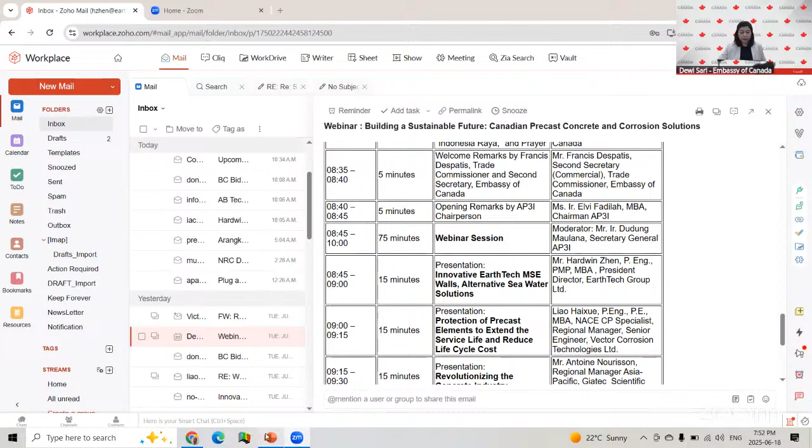So good morning, everyone. I'm happy to be here to introduce EarthTech Solutions and its e-panel and e-wire systems, which could be used for projects in front of water, especially for the seawall, the giant seawall in Jakarta. So today, mainly we introduce the two systems under the company, and also some outstanding applications compared to the other systems available in the market.

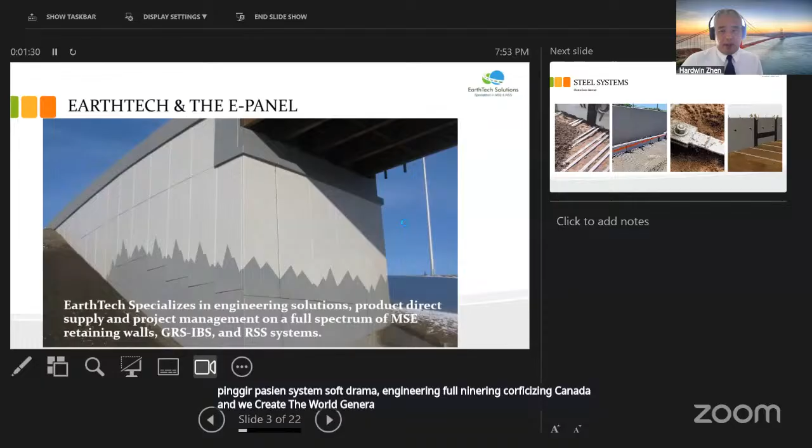EarthTech is an engineering company focused on all different kinds of MSE retaining walls, GRS-IBS systems, and RSS systems. With full engineering qualification in Canada, we could work closely together with local companies to deliver the project, even though the partner internally has no experience in retaining walls. So we can do the product supply and the project management also.

Retaining wall systems all over the world right now could be classified into two categories. The first one is steel, which means using steel as a soil reinforcement behind the panel. When we talk about a panel wall, actually all the panels are required by project spec, so they are all the same. But the suppliers just work differently at the back of the panel.

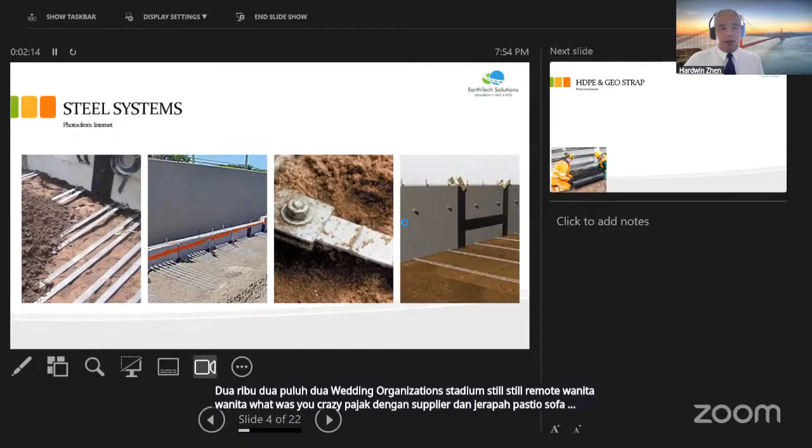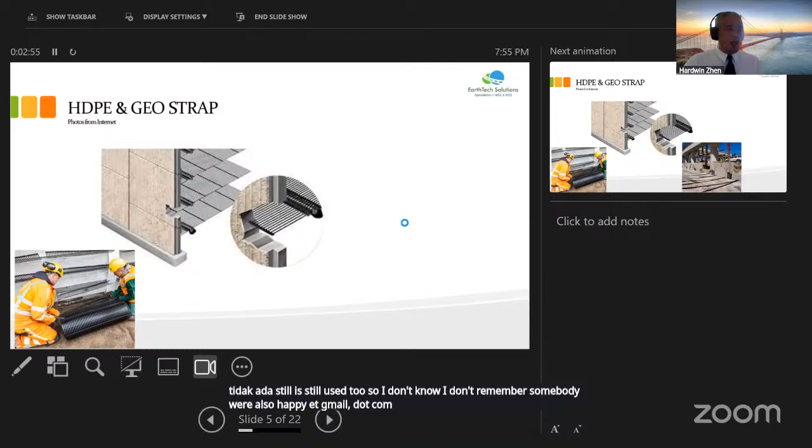Steel so far has the advantage of being a rigid system, but the disadvantage is especially in front of de-iced water, so corrosion is a big concern. Inside of the panel, currently we upgraded it into stainless steel, but behind it, it's too expensive to upgrade from coated to galvanized, then low carbon, and then stainless steel. So other than the steel soil reinforcement, we also have HDPE geogrid, using the geogrid to connect behind.

But this system has a disadvantage: the creep factor, and the connection between the two pieces has a gap, which may allow the panel to rotate a little bit during the installation or after.

So that's the two major systems. Meanwhile, usually you see this geogrid called the polyester geogrid, which was widely used in foundation reinforcement and for retaining walls without mechanical connection requirements. So it's very popular, but due to no mechanical connection, it was used only for a certain area.

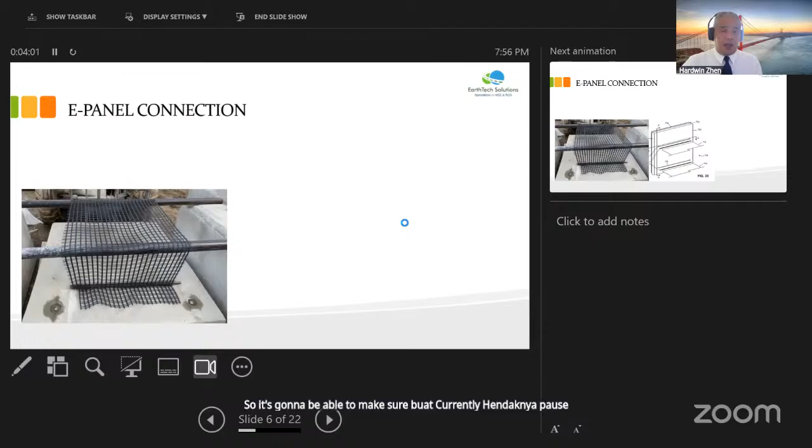But currently, we find the way to connect it to both the concrete panel and the e-wire basket. So we call it e-panel and e-wire system simply. While you use this material, in the market it's 40% cheaper than the same strength of steel and HDPE. So the overall system saving will be over 20%.

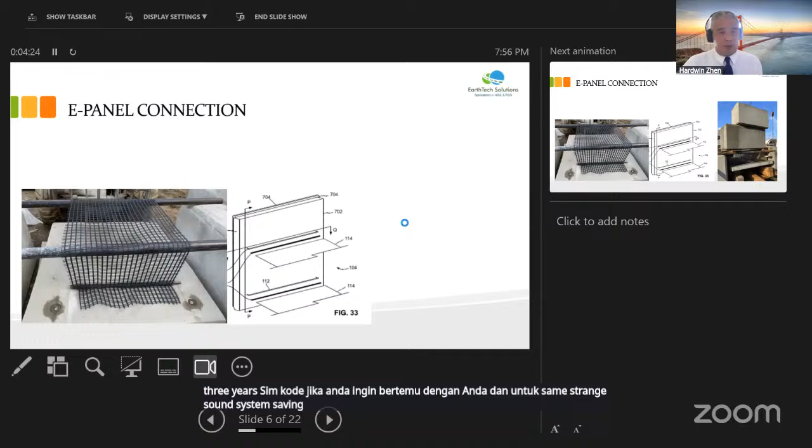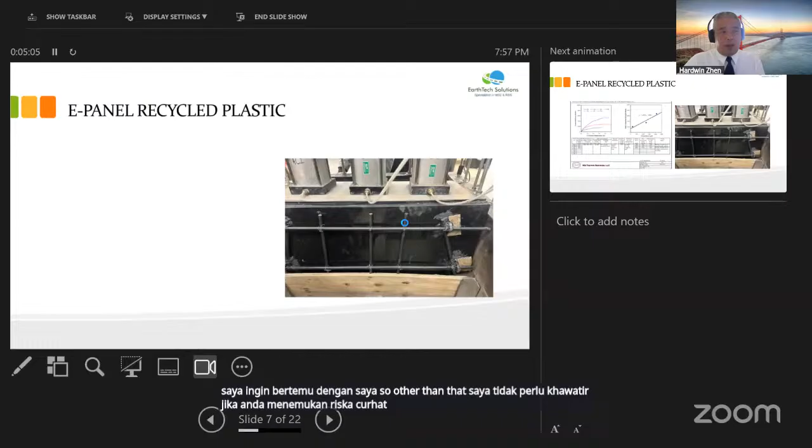So other than that panel system, we also could just cast the panel using recycled plastic. That's the test in the lab, and we got a successful result after. With the system, we can use it for different kinds of finish from the front - they are all the same comparing to any system if you need.

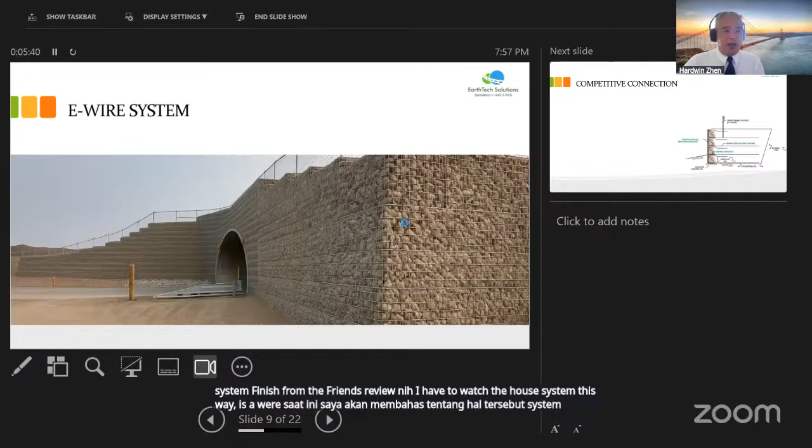After we talk about the panel system, this one is the E-wire. So the e-wear means a kind of L-shaped wire system using the machine to backfill it. With mechanical connection, we can build it straight.

Usually in the market, you see the wire system is like this, either for a short wall or a permanent wall at 70 degrees or shallower, or a temporary wall. So you couldn't use it for a high wall permanently straight, except you have a mechanical connection.

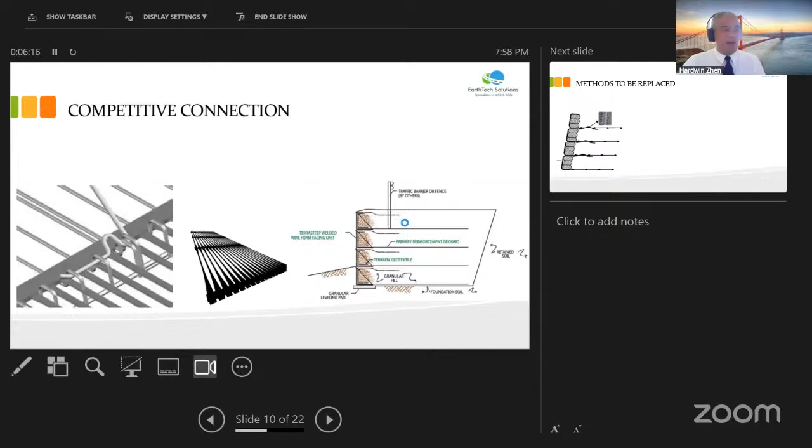And this one has a mechanical connection, relying on the bar to connect to the basket and hold it. And most of you may see those systems in the market.

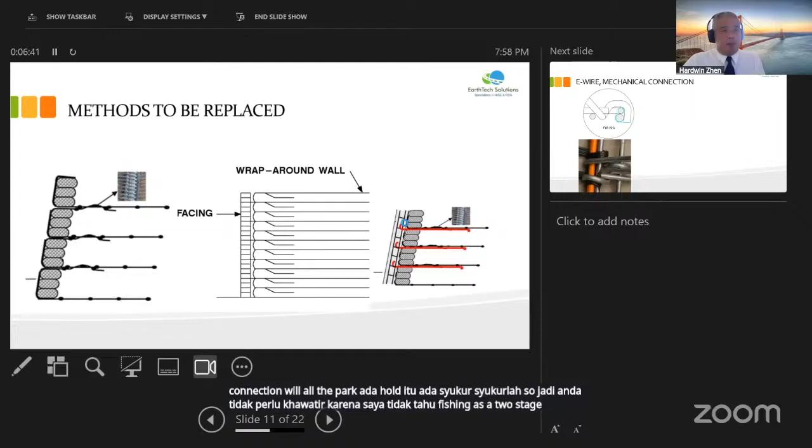Also, they use a geogrid wrapped around the filled bag. And after that, they just add the second facing as a two-stage. But remember, while you do that, you need lots of steel. The red line represents extensive steel between them.

So when we talk about the E-wire system, comparing to the traditional way used in the market, we wrap it around the bar in the basket. And meanwhile, we use a very strong strut to hold it in place and go against the direction while you're pulling it.

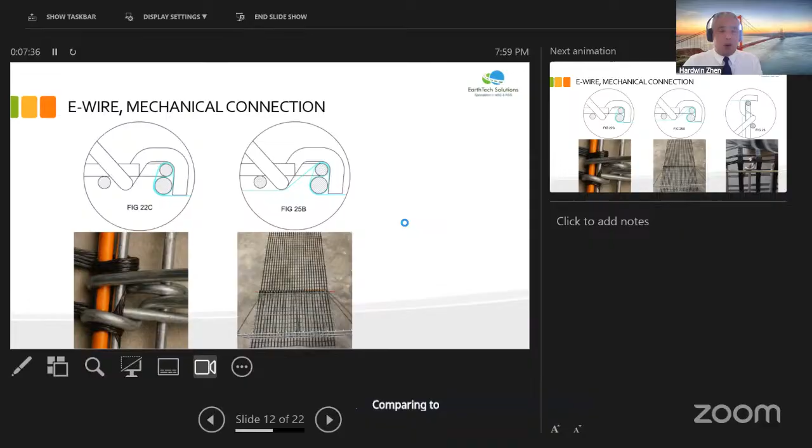So while you're pulling two pieces separately, go with one piece, go underneath of your basket, you can use it for two-stage, which will make the two-stage system way easier, and the overall cost comparing to the competitive will be over 30%, even 35% cheaper.

So if you rotate the basket another 90 degrees, you will see a very similar wrap around with a picture I just showed you. But this one has two advantages. First one, you see on top, we have a bar with the geogrid go inside and around it, which means you get all the strings go at the same point to bend back. So it's optimized for the finish and then optimized for the strings.

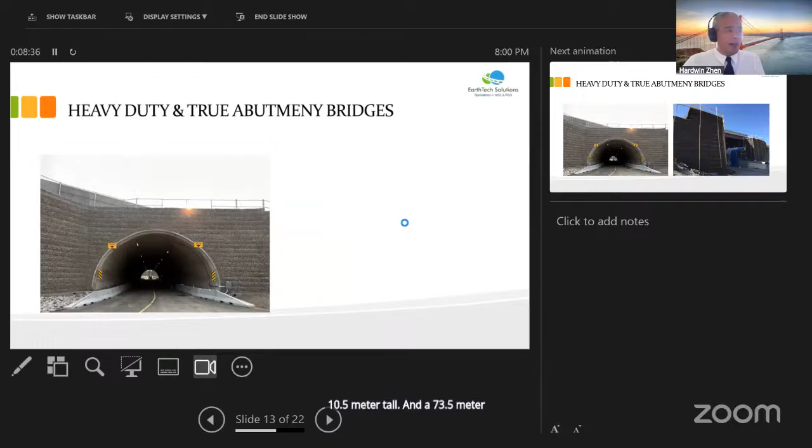So using the system, we built the world's widest bridge. This one is 10.5 meters tall and 73.5 meters wide. And it is heavy duty with 102 kPa. Usually you won't see that much, except in the mining zone. That's for the big mining trucks.

And then along the Trans-Canada Highway, we built the true abutment bridge. That's 11.76 meters tall, and that's very, very tall for a true abutment, which means there's no piles underneath of the superstructure. So all the superstructure sits on top of the wall only.

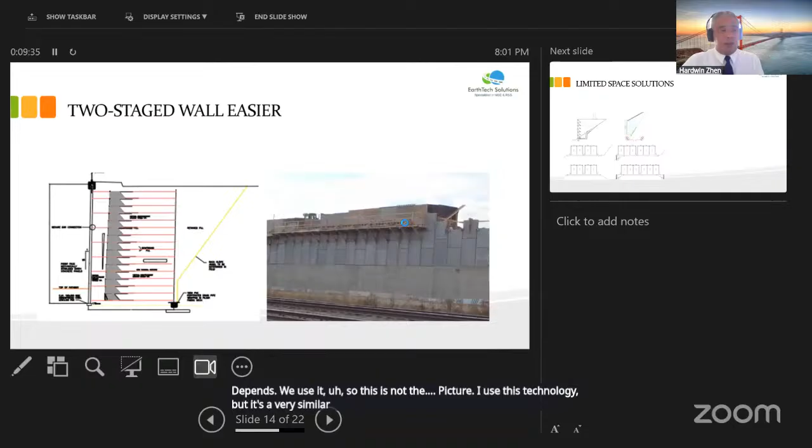So here is a two-stage example where we designed it. You see, we can keep multiple connections to the panel, and meanwhile the distance is flexible. We can adjust it, depends. So this is not the picture using this technology, but it's a very similar one I did, 12 years ago.

So other than the simple wall and the two-stage system, we also have a very special situation where the other systems usually couldn't be used. For limited space, such as when you're working in front of a mountain or a slope, you don't want to overcut it, so without enough room to run the geogrid.

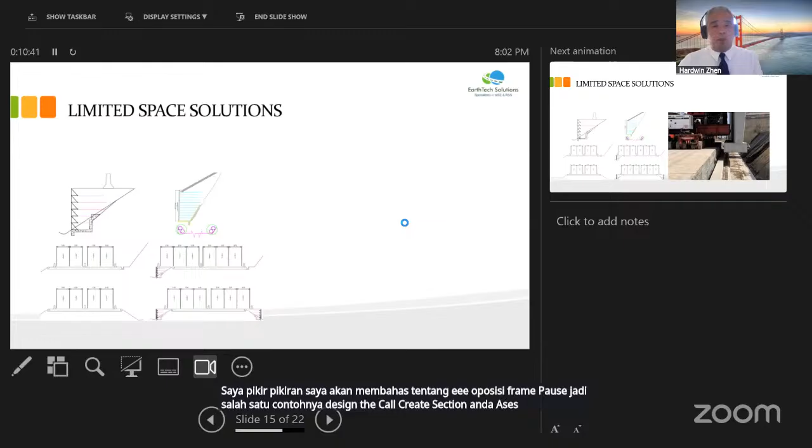In that case, we have this solution. We can cast concrete at the bottom and connect either the basket or the panel on both sides from both ends. So there's no limit on the spacing. We can design the concrete section based on its weight and size to balance the overturning and sliding, and solve the problem for some special situations. That's a unique requirement for this system.

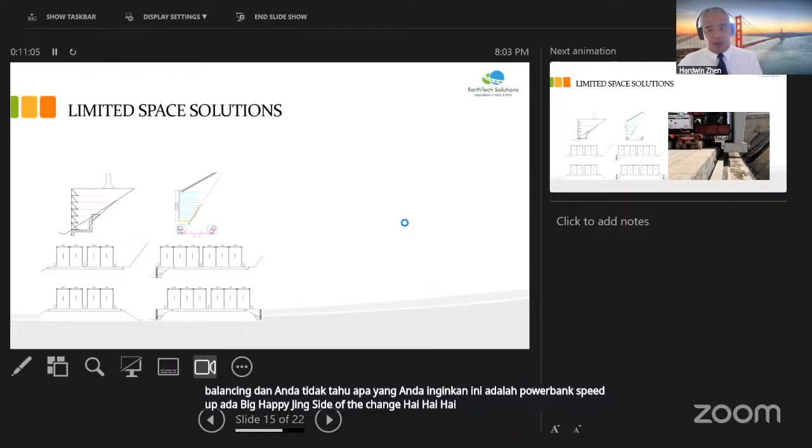So you may ask a question, is it strong enough to do it? This photo shows a project in Ottawa using this basket for 240 kPa, which is 15 times the normal heavy traffic load, and allowed the bridge replacement in 3 days. That means 72 hours for an 8-lane bridge. We replaced it and got the traffic back.

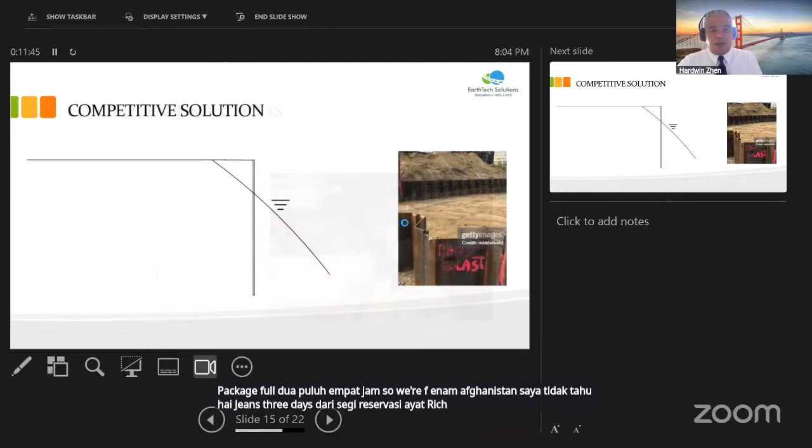Another situation, especially good for the giant seawall, is this one. Usually while doing structure along the ocean or some waterfront or soft ground area, it's very difficult, unless you just use pile driving into it so that you can get a small area on top.

Comparing to that, you see this one, we can do 2 baskets, simply connect them together and fill with rock. The rock will push it in opposite directions and keep the gravity on top. In that case, we can get it with more loading. The basket will be stronger with more bearing pressure or bearing capacity underneath to support it.

So once we get enough bearing capacity for this one, we'll do a wall on top, and then you can do either a building, parking, or bridge on top of that along the water, and you can go close enough to the wall. So that's the solution for something in front of the ocean.

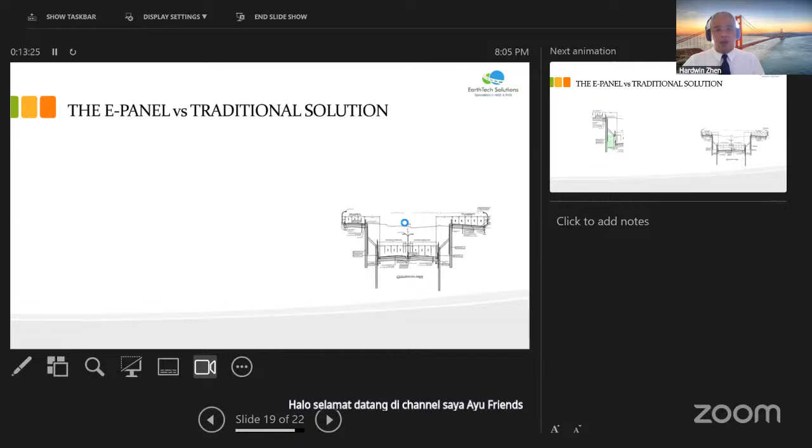With a strong connection, especially for landsliding or seismic situations, the system will help you with that. So that's a real situation, and we just value-engineered it, changed the piles. We connect those 2 piles together so that we can cut off the pile, the panel underneath the ground, so we don't need to go that deep. That will help you solve the problem easily.

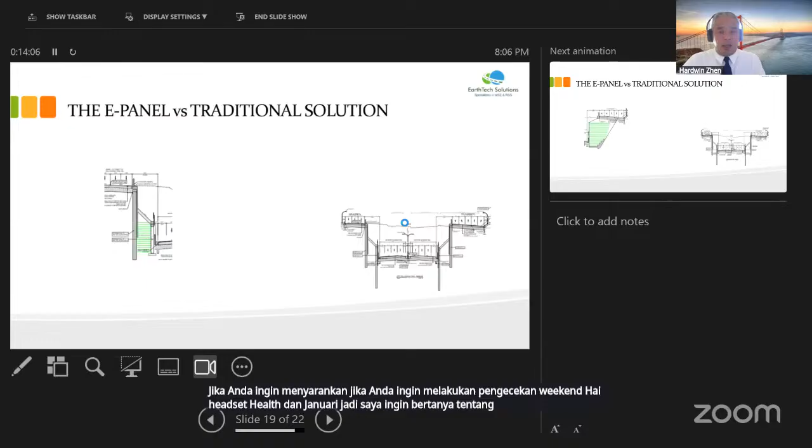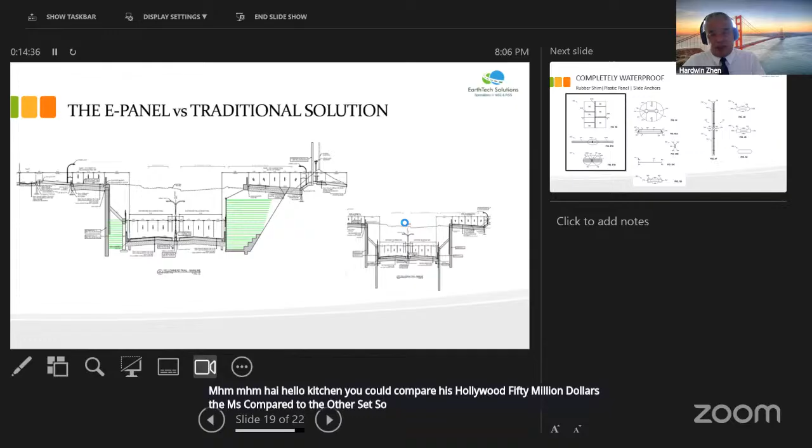If you don't think that's safe enough, you can also do another way. That's another option, using the MSE system replacing those 2 panels, concrete panels. You can compare how the 150 million dollars of the MSE compares to the other side. The original design was very, very strong, thick and deep, and used so much concrete.

While you do a wall in front of water, you also may need some waterproof system, and we do have technology to make the panel waterproof. If you require the water to be absolutely kept away from the other side, we can do a plastic panel with a rubber shim and a slide anchor so that we can keep the other side dry.

To summarize, some of the advantages: it's reliable against landsliding and seismic events, and especially the overall cost is saving a lot, and it's environmentally friendly, especially for a 700 kilometer giant seawall. If everyone is interested in more information or has any questions, just scan this code for the website and contact me for partnership. Thank you, everyone.

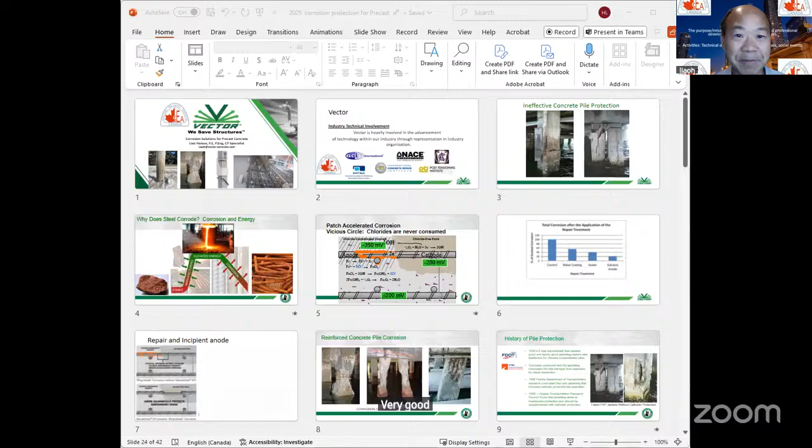Okay, I'm going to bring this over here. Yes, we can see that. Can you hit full screen, please? Okay, go back here. Minimize. Okay, full screen, good now. Is that all good? Good, yes, okay, good, thank you.

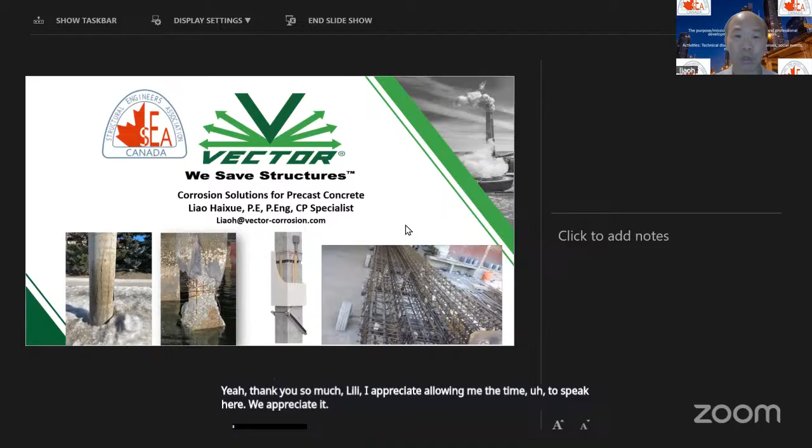Thank you so much, Lili, I appreciate allowing me the time to speak here. We appreciate it. Thank you for the introduction. Thank you, Davi, thank you the board and the chairwoman.

So I'm going to talk today about how we could prevent and control corrosion in precast concrete, and how we can extend the life of precast concrete. Like the chair said, we grow, we green, we sustain. We do that so we can do for piles, for the poles, for precast beams, and slabs.

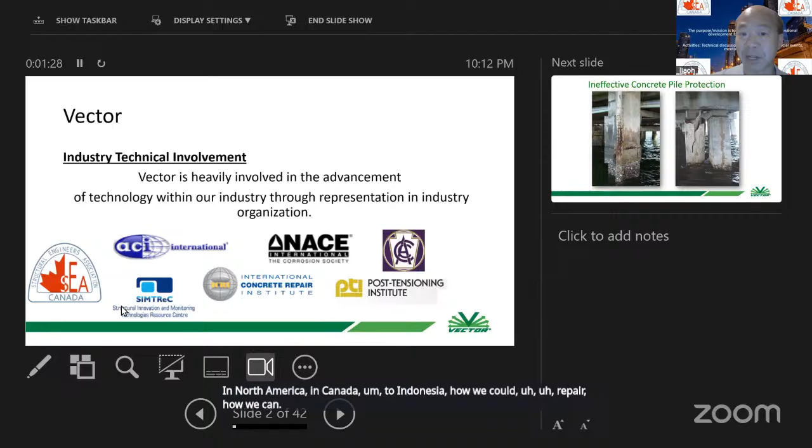A little introduction about Vector, we've been involved a lot in the industry, like ACI, ICRI, Structural Engineering Association, PTI. We would like to bring our best practice in North America and Canada to Indonesia, how we could repair and extend the life of our structures. So we will help the industry in Indonesia.

We learn a lot from our past, we learn a lot of lessons, so we're prepared from the past. We started in '65, and started to do repair in 1978. So we've been doing repair for 30, 40 years now. We learn a lot from the past, and we learn from other people's mistakes and from other projects as well.

So we know like for marine piles, when they've been there for some time, then you have some repair to do. But if you just do a conventional repair like this, then we're going to see adjacent concrete start to... sorry, I don't see the pointer, that's fine.

So you can see, well, we could do the repair, but you're going to see problems later on quite fast, maybe 3 to 5 years on average. I know most structures in Indonesia now are new, but you're going to see more and more older structures start to see spalling, and we could help to repair.

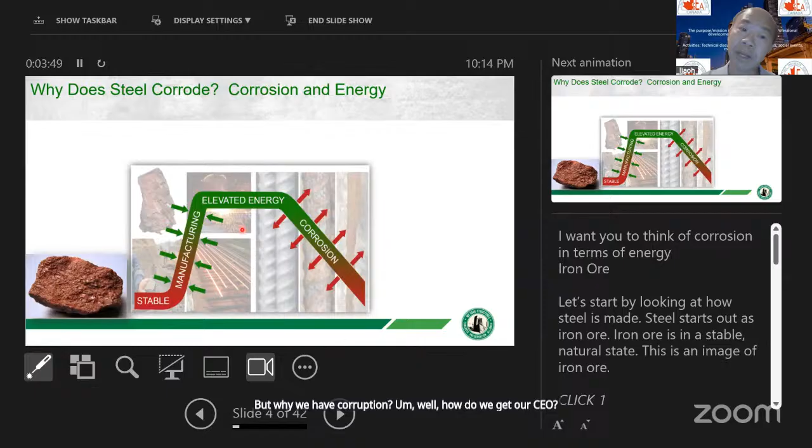But why do we have corrosion? Well, how do we get our steel? We get our steel from iron ore, from iron oxide, right? And we put lots of energy into this iron oxide, so in the steel there's a lot of elevated energy. It will go back to its iron oxide state, could be 30 years, could be 50 years. But what we could do is delay that process, from 30 years to say 100 years, 50 years to 150 years. We can do that, so we could use less concrete, less rebar, and conserve the environment.

Talk about repair, we've been doing repair for 30, 40 years already, so we know what's going on. When you do a patch repair, especially in Indonesia's environment where you have a lot of sea, a lot of islands, a lot of structures by the sea, seawalls and piles, when you do repair you may cause more corrosion in adjacent concrete, and later on it starts to corrode. So we've been doing a lot of research in the past.

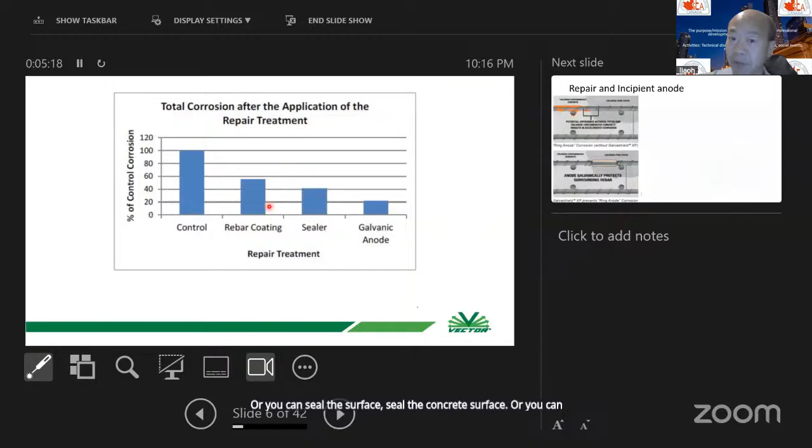Different technologies, which one lasts longer, which one works the best. You can do control or do nothing, just conventional. You can coat the rebar with epoxy, or seal the concrete surface, or add an active galvanic anode into the concrete. All these options will work to some extent. The rebar coating will help reduce corrosion by 40%, sealer can reduce that by 60%, but the galvanic anode will reduce the corrosion by 80%.

You still have some corrosion there, but you're going to reduce a lot of corrosion, and that's how we could extend the life, say from 30 years to 100 years.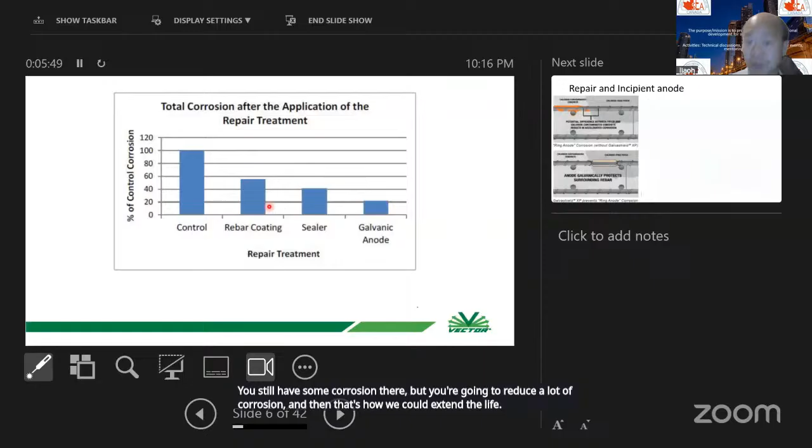And talking about repair, we've been doing lots of repair. I think there's a little video here. Let's see if the video works. Okay, sounds like the video doesn't want to work. But anyway, that's fine. So when we do the repair, like here, we're going to have the problem of adjacent concrete, and then we will cause more corrosion. By adding the anode into the concrete, then we have no problem, and so it will attract all the corrosion to the anode.

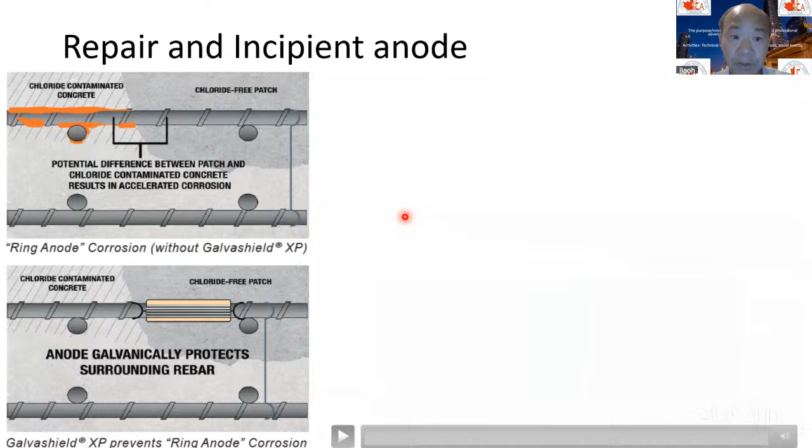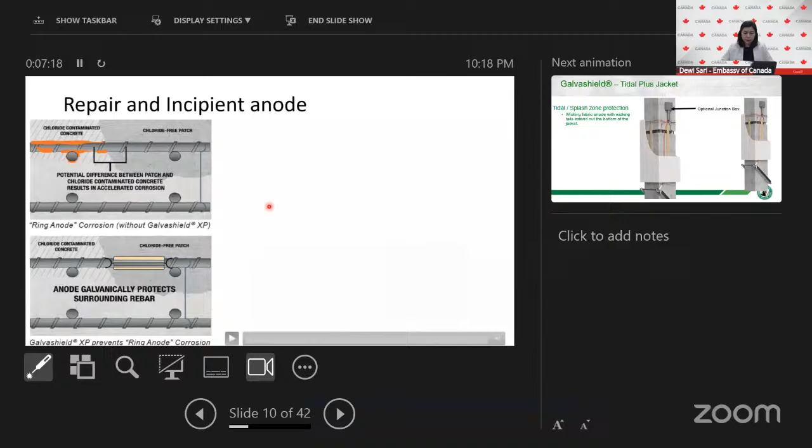It's not moving. Interesting, why are my slides kind of frozen? I moved my slide already, but do you see my slide moving? It doesn't go. Yeah, we still see the same page on repair and incipient anode. Try to play the video here first. Sounds like I need to exit. No, it doesn't want to. You can see I do this, but it doesn't want to move. Maybe I'll exit first. I'm going to reshare. So we were here. Okay, let's start from here. So we just forget about that video.

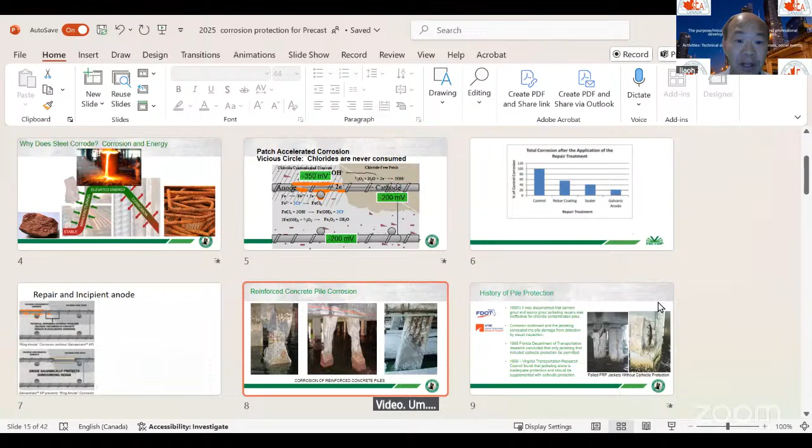Okay, so we talked about this repair. We talk about piles, these precast piles. You see, we call this necking. A large corrosion on this 30-meter pile. The corrosion is focused on this 1.5 meters around here, in the tidal zone, splash zone, and it becomes smaller.

You lost me? Can you hear me? Yeah, you're back now, we can hear you. Okay, my bad. No worries, please go ahead. Can you see my screen? Yes, the screen shows the pile, the necking of the pile, right? Necking of the pile. Okay, let's keep going.

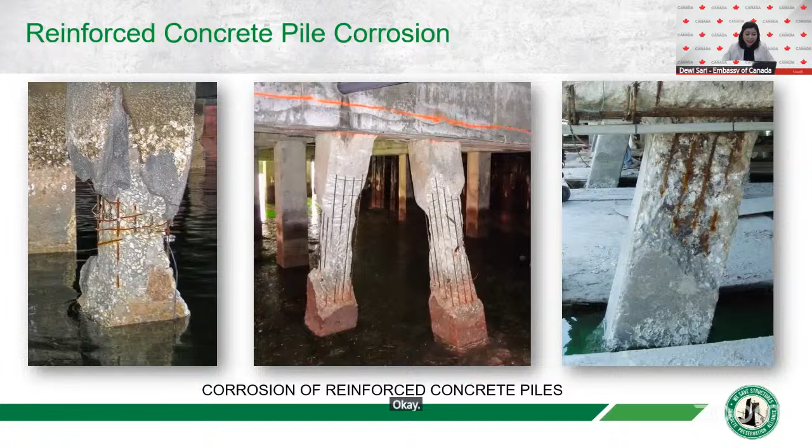So you see the necking of the pile, and this is what we see a lot. And talking about history, we've been working together with DOTs like Florida DOT and Virginia DOT. They've been doing piles since the 80s, and they did epoxy jackets, concrete jackets. But later on, they found that when the chloride is already in the pile, doing a jacket is like giving a sick person a cloth. It doesn't really address the cause of the problem. So in the 90s, they knew it's not effective, and concluded only the jacket with cathodic protection is permitted. Otherwise, better just don't do it.

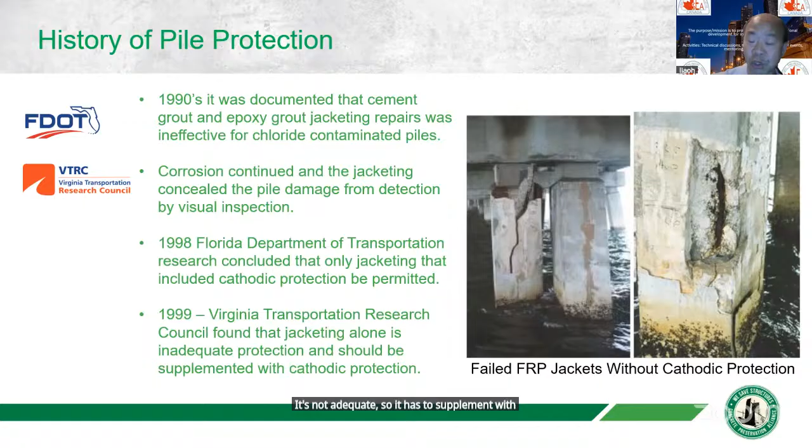And you can still see what's going on there. In 1999, Virginia DOT also said the jacket alone, concrete jackets, epoxy jackets, is not adequate. It has to be supplemented with cathodic protection. So we learned a lot from the past.

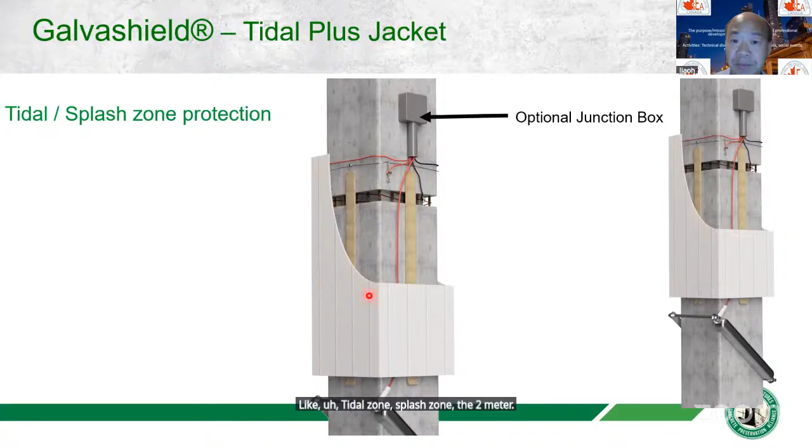That's why we put this system there in the tidal zone, splash zone. We're going to have a jacket, and we're going to add the anode into the system here. So this is the anode and the jacket, and we need to connect the anode to the steel to control the corrosion. For this 30-meter pile, we only need to protect the tidal zone and splash zone, the 2 meters. So we target the protection where it's needed.

And also, even below the seawater, like in the sea, either concrete piles or steel piles, they all still corrode, but at a slower corrosion rate. That's where we still have this bulk anode under the seawater. So that will control the corrosion of whatever is in the seawater, so we get increased protection.

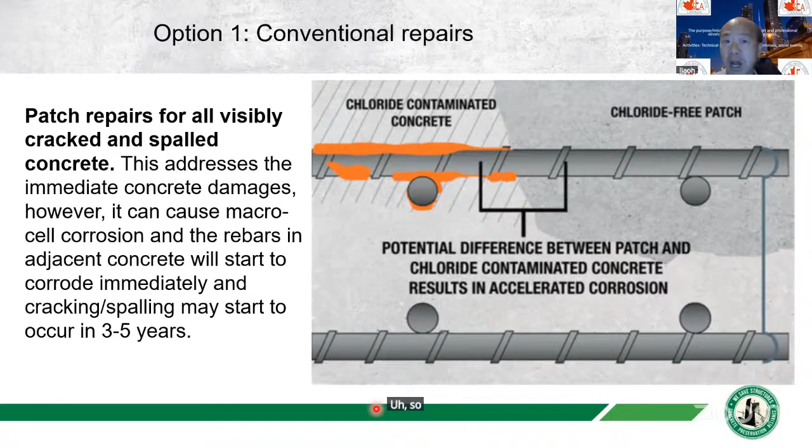And they have options. At the evaluation stage, they actually thought about a few options. Well, what if we do nothing? Just do whatever we've been doing in the past. Then they have to come back every 3 to 4 years to repair. Average repair lasts about 5 years. Precast concrete lasts longer, definitely, but the average repair is like 3 to 5 years. So they know they need to repair again and again and again. So then they go to other options, like

in the patch repair, they put in the galvanic anodes, and also where they have sound concrete. So they know even the concrete is sound.

Hello? Yes, go ahead. No worries. Can you still hear me? Okay, this says recording stopped. Okay, that's fine.

So we can put anodes in the patch. We can also put them in good concrete areas, when we know the concrete is sick, so there's a problem there already. So we can give this concrete some injection, like when we're sick, we get an injection. We drill a hole, put the anode in the hole and connect it to the rebar. That will control the corrosion, control the cancer cell there.

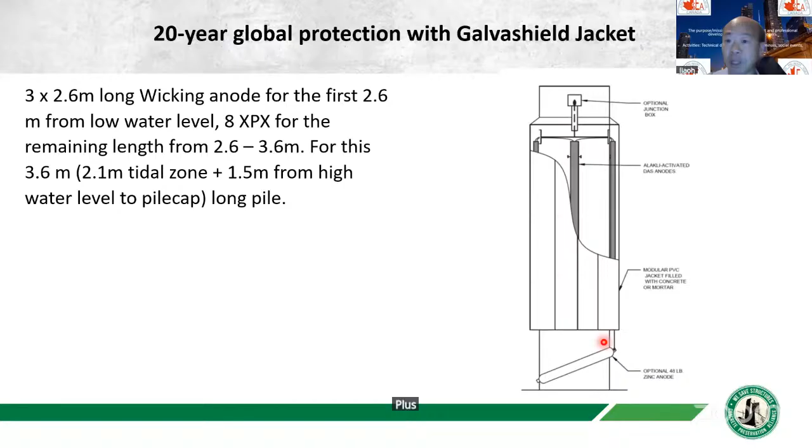And you have another option. We can do global protection, like 20 years of protection. You do a jacket with the anode in the jacket, and then you have this anode under the water, so that can provide you 20 years plus protection. But if you want longer, you add more anode in the jackets. That will give you 30 years, 40 years of global protection if you like.

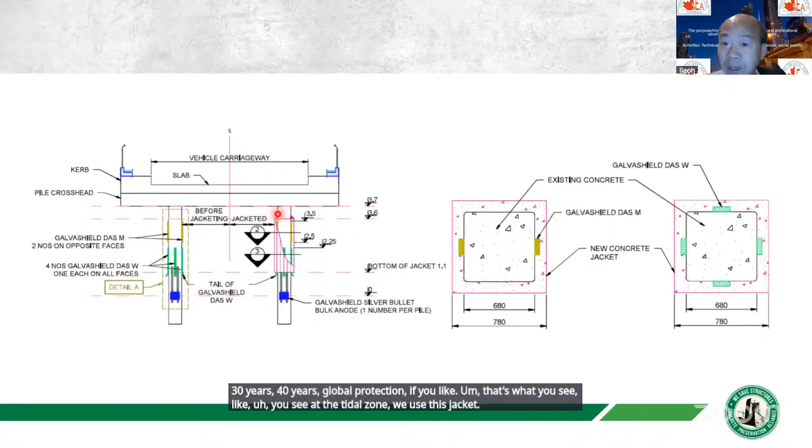And that's what you see. At the tidal zone, we use these jackets. In the dry area we use less anode, but right at the tidal zone and splash zone we use more anode. Then we have jackets, and we also need to connect to the rebar and stop the corrosion. Once finished, it's like this, a pretty new, pretty good jacket there.

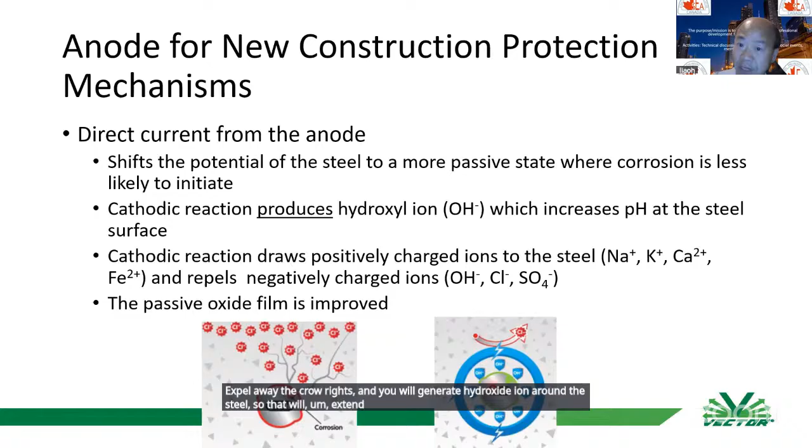And then, well, we learn a lot from our past. We learn from our mistakes. That's why we think we could actually use anodes for new construction. How does that work? In corrosion, it takes time for the chloride, the salts, to get to the steel level to corrode the steel. But if we introduce galvanic anodes into the concrete, it will make the steel a cathode. It will expel the chlorides, and you will generate hydroxide ions around the steel. So that will extend the repair cycle by 20 years further.

For example, here's one of the jobs we worked on in Puerto Rico, a ferry terminal. They knew they had the problem. The old structure was 35 years old, so they had to replace it. That's not good. So they want this to last longer. They want the repair cycle at 35 years, and then another repair cycle so they can last like 75 years. That's what they really want.

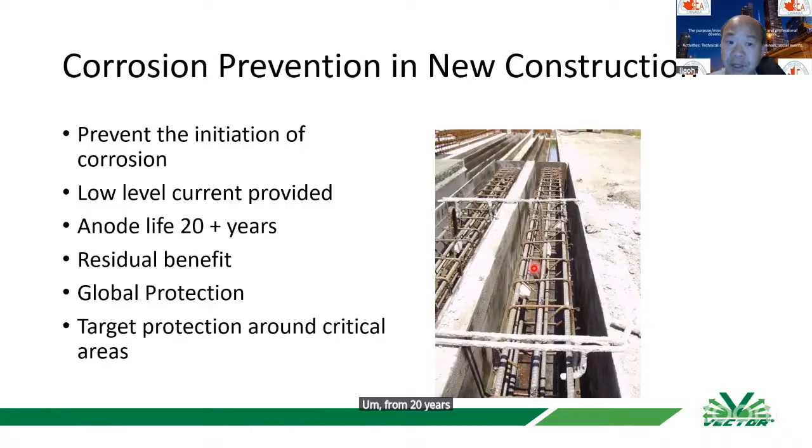They know the problem is literally at the tidal zone and splash zone. So they can target just around here when they precast this pile. You can see that's the head, and then they put anodes around the tidal zone and splash zone. They will be able to delay the repair cycle from 20 years to 40 years. They have all the rebar cage, they install the anode there, and then they cast concrete. Then they drive this pile into the sea, and that's pretty good. Then they will last longer. We also do a lot of this for seawalls.

For seawall, similarly, the only problem is really the tidal zone and splash zone. That's where, when we precast the panel, we install this green thing, the galvanic anode, into the seawall. So that's the tidal zone and splash zone. And once we do that, that seawall will last 50 years without repair.

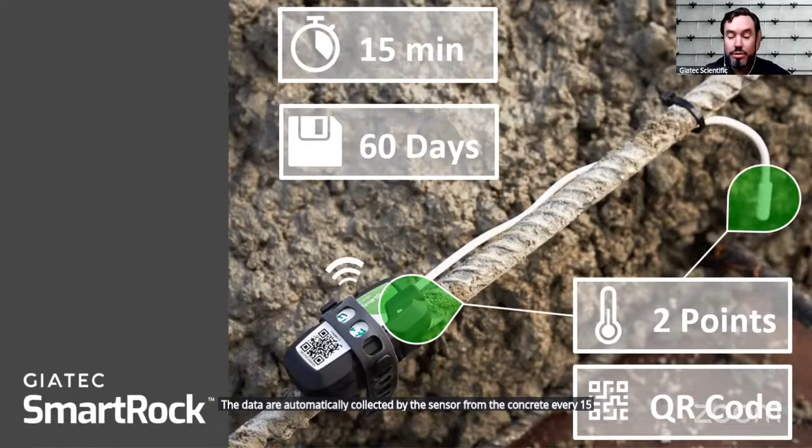60 days of data will be stored in the memory of the sensor. The data are automatically collected by the sensor from the concrete every 15 minutes without the help of anybody. In terms of installation, extremely straightforward, very user-friendly. You tag the sensor with the app, you install the sensor on the rebar. If there is no rebar, you just sink it manually in the concrete pour. You pour your concrete, you get the data immediately on the smartphone. So this is the hardware.

Now the web tool, the software tools. First of all, the mobile application. The mobile application is called SmartRock application. This is an app where you can create your projects, your areas, sections, subsections, tag your sensors, get the data instantly via a Bluetooth signal with the sensor. So the sensor is in the concrete, it's connected to your mobile phone thanks to the transmitter, the Bluetooth antenna, and communicates the concrete data via Bluetooth. The range is 12-meter distance.

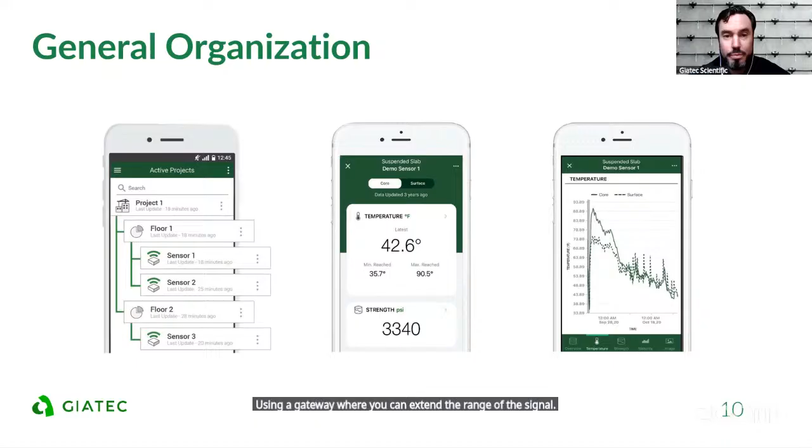Okay, we have another solution called long range, using a gateway where you can extend the range of the signal to be able to collect data remotely if necessary, okay? But already from the app, you can get the results, create graphs automatically, send reports, share the reports or data with your team members, with your clients, with the engineering firm, etc., and manage your users.

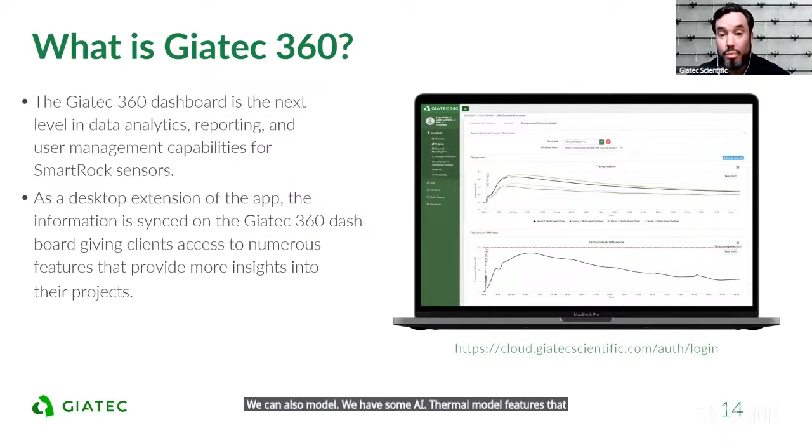The second software tool that we have is called GIATEC 360. It's the next level of analytics, basically. So the sensor is connected via Bluetooth to the app, the app is connected to the internet, and will send the data directly to the GIATEC 360, which is a cloud-based dashboard, okay? On this cloud-based dashboard, you will be able to spend more time to analyze the results, the data, plot data together, isolate sensors, pours, manage your users, manage the mix that you're using, use the artificial intelligence features where we can predict temperature and strength. We also have some AI thermal model features that can model your pour before you pour your concrete itself. And this is it for the software tools.

So I presented you the hardware, which is literally the device that you put in the concrete, how it works, how it's installed, and how the data are collected, exploited, received, analyzed by our systems. Now, of course, this is only a very brief description. Our sensors collect temperature automatically. We use a thermistor. It's a type of thermocouple, much more accurate. How do we get the strength data, you could ask? Well, this is simple. We use what we call the maturity principle.

I don't know who of you is familiar with the maturity principle in this room. Maturity is a standard, a methodology, that was invented in 1959. So it's not new, right? We have not invented it, and to get the strength data, there is no magic. So we use this method that is standardized by many different standard bodies worldwide, ASTM, CSA, Eurocodes, Australian codes, Indian codes, Japanese codes, ACI. I know the ACI in Indonesia is pretty recognized and used for compliance. So this is definitely something that you can use. The standard most commonly used for the maturity method is ASTM C1074.

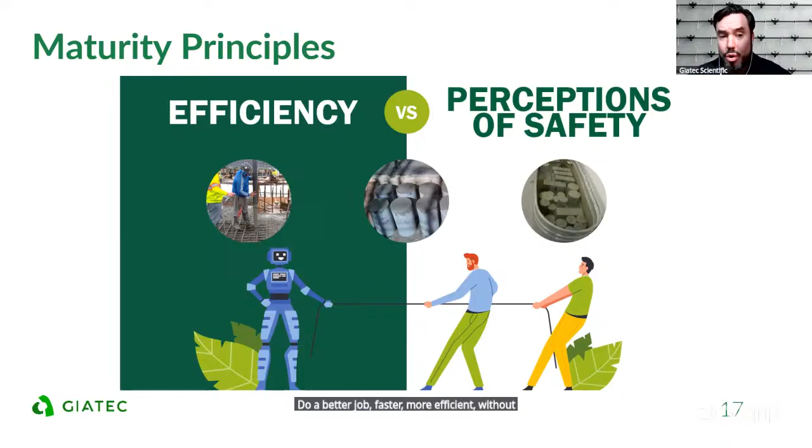Moving on, you will understand maturity principles, so using the science and using our advanced concrete sensor, what we're trying to do here is to basically close the gap. Close the gap between what? Between the way that the concrete is tested on site in precast factories for very critical operation like pre-stressing, bring accurate data to the users, to the batching plant owners, to the factory owners, so they can do a better job, faster, more efficient, without compromising quality. And we call this efficiency.

So what benefits using our sensors with the maturity methodology? Well, there are various, but obviously productivity. Having the strength data and the temperature data in advance allow you to get accurate data that you did not have before. And those data will help you to keep your planning under control, accelerate your production lines, and reduce your project and reporting time. This is extremely important, especially when it comes to factory where you have several production batching lines and you need to improve productivity.

Quality, of course, because you can improve the performance, you can keep the temperature under control, prevent cracks, and again, guarantee the durability of the concrete that you're casting. So if productivity is improved, if quality is improved, then obviously safety is improved. Okay. And ultimately, we have the sustainability aspect. Sustainability aspect comes from the artificial intelligence that we are using in our system that is analyzed by our AI bot that we call Roxi, and that will give us the opportunity in suggesting opportunity to reduce the cement content in the mix directly related to the CO2 emissions.

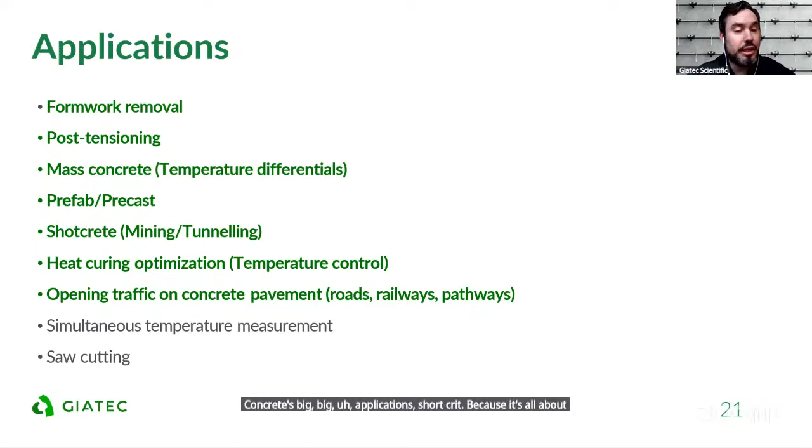In terms of applications, formwork removal, post-tensioning, mass concreting, prefab and precast, shotcrete, big application, shotcrete, because it's all about a very early age, heat curing optimization, open traffic through concrete road pavements, etc. Every concrete element deserves to be tested. Now, by experience, if you ask my opinion, the load-bearing elements should be prioritized. So the beams, the piles, the slabs, the post-tension slabs, the pre-stress elements, and of course in your sector, precast, pre-stress, huge advantage for quality control.

Last but not least, sustainability. I touched base a little bit already about it. So this is Roxi. This is our first AI program for concrete testing. Roxy can do many things. You understand we've been a pioneer in the industry to use AI with advanced technology for the concrete. And we are now strong of hundreds and hundreds of millions of data points in concrete. This is actually factual. I think the exact number is close to 200 million points from the fields, developing our own algorithms.

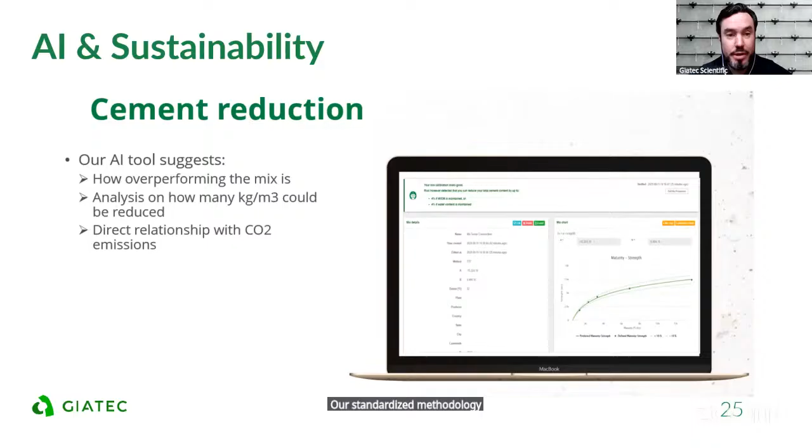So if 3 or 4% reduction of cement is suggested and is actually applied in the mix design, this can lead to hundreds and hundreds of tons of CO2 saved, just like that, without the need of complicated formulas, softwares, engineered staff, and whatsoever. Just by following our suggestions, just by following our standardized methodology data that you can rely on. All right, this is it for me.

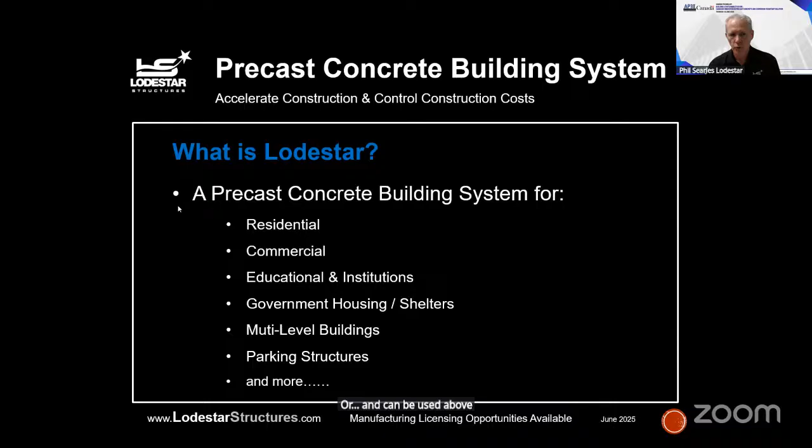When we talk about Lodestar, to set the table and explain what it is at its simplest form: Lodestar is a building system. The building system, when assembled, has the ability to produce residential, commercial, any building today practically that you're building using traditional materials, whether it's metal, wood, cast in place, or even tilt-up. Our system can be used below grade and above grade for projects like I mentioned, but also parking garages and other applications.

Lodestar, the product itself, is reinforced concrete. Everything about the product is produced in a precast plant using molds, traditional to what you're used to today. The products are engineered building materials, so when produced in a certified plant and delivered to site, the certification goes with it, making the construction process a lot easier and more efficient. It also satisfies building code requirements to be certified ahead of time in your market, accelerating the approval process.

Because it is off-site manufactured, it can be produced ahead of time prior to installation schedules, delivered to site for rapid installation with fewer resources required at the site. Looking at the Lodestar system, to give you an understanding of the speed, we're consistently achieving rates of about 90% savings on site for construction. We do that by leveraging the ability to produce precast bases, precast structural units, and other precast components, reducing or removing the need for that type of work to be done on site. So when the product is delivered to site, it's just a matter of installing.

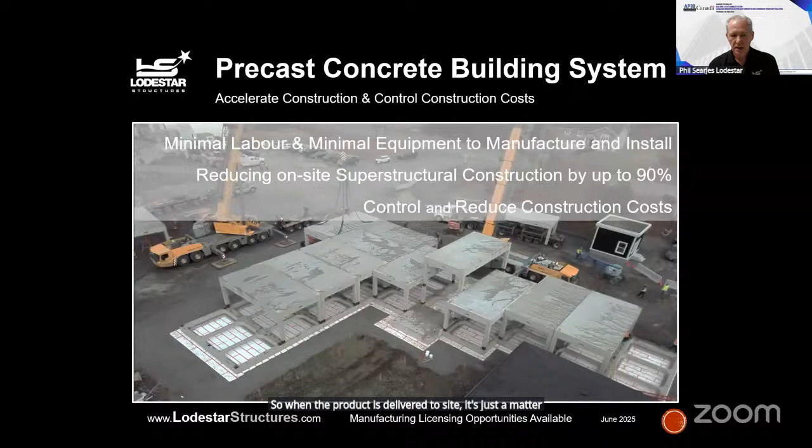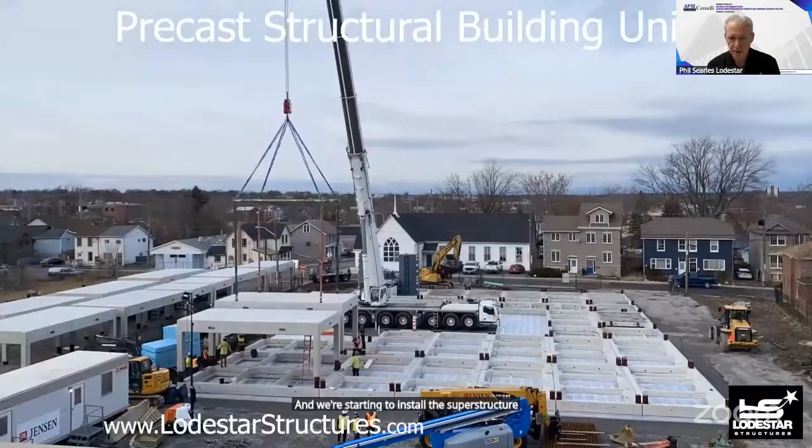I'll share a video to show one of the illustrations. The installation method is a simple crane-in-place solution with precast modular components. We're seeing a project of about 15,000 square feet. The base units were installed in the first part of one day - about 6 hours in, and we're starting to install the superstructure, the structural elements of the building. Note there's minimal ground crew, and the tools they're using are simple hand tools. The crane is doing the lifting, putting units in place, and at the site it's really just a bolt-together connection process using wrenches and a couple of ladders to connect and disconnect.

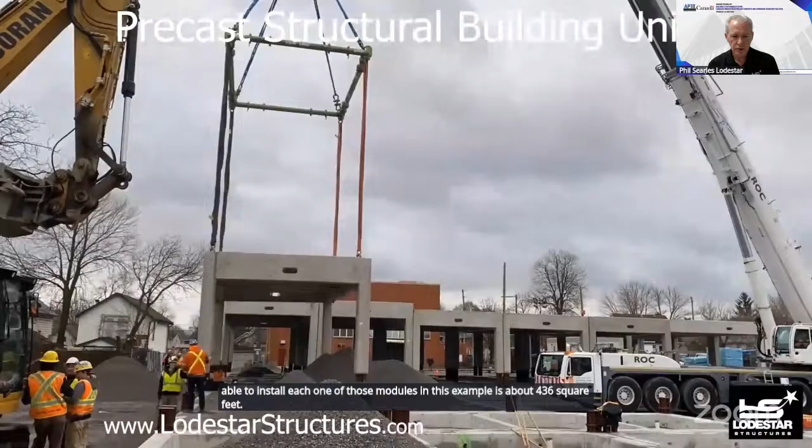Each module in this example is about 436 square feet, and we're able to install that much about every 7 to 8 minutes. To support this rapid installation, we've developed a lift system that allows us to rapidly lift the products, deliver them to site, and then lower them.

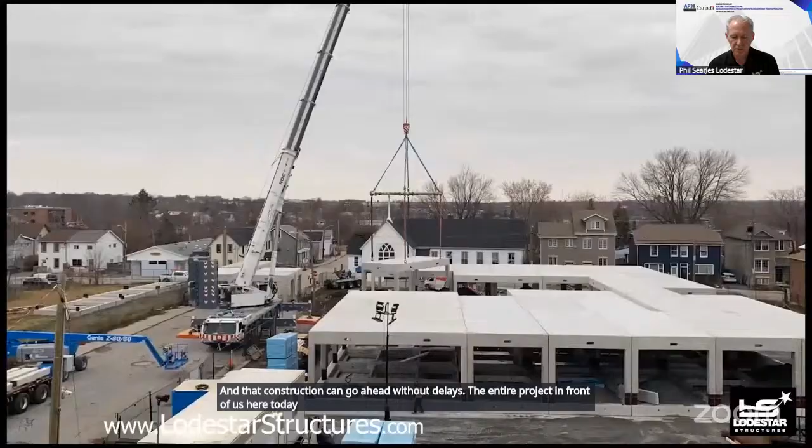On the left of the screen you can see a real-life example of units coming into place to feed the crane, ensuring zero downtime so construction can go ahead without delays. The entire project here is 15,000 square feet, completed from start to finish in 28 hours. This is the final day, using simple hand tools, one crane operator, a small ground crew, and minimal equipment.

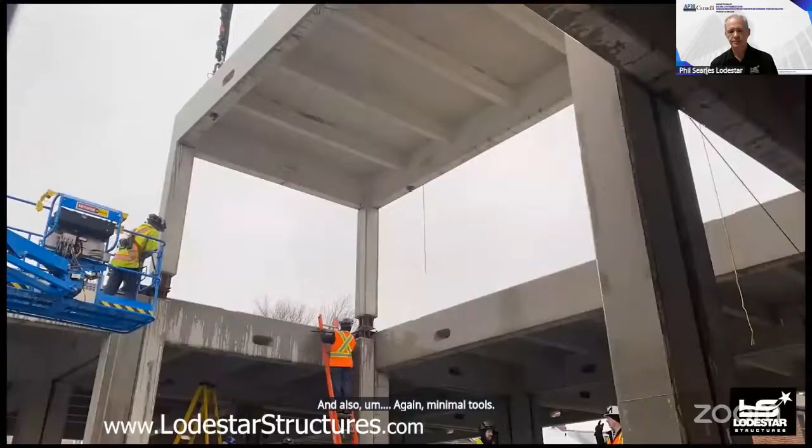The last day is a matter of putting the units together. You can see the units can be stacked vertically across multiple levels, and can be elevated as well. We have extensions that allow the modules to be lifted up to give extra headroom for custom features on the projects.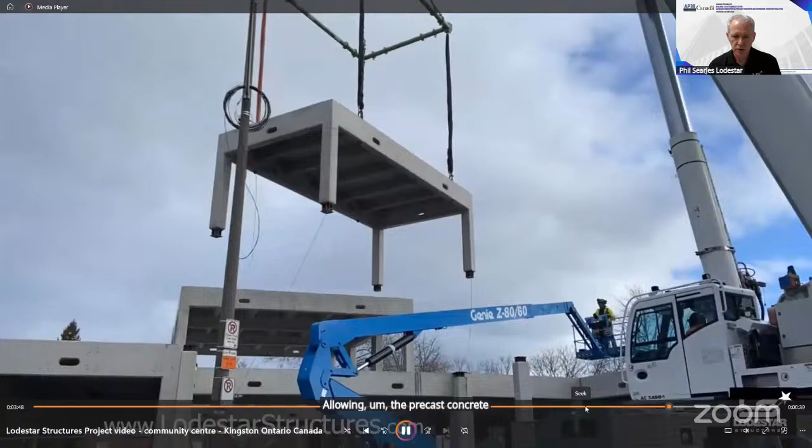We also have a solution allowing a precast concrete wall panel to be installed in the products. All components we introduce into the building system are predetermined and calculated, allowing for on-site installation with minimal tools and equipment.

The wall panel system works so that as fast as we can bring panels to the project, they're set down on a metal bracket, with a corresponding bracket on the panel and another on the Lodestar system. Between those two, you can install hundreds of square feet of wall panels on a building project, at about 5 to 6 minutes per panel.

Looking at some example projects, this one is actually in our office here in Canada, where we completed a 6,000 square foot project in 4 hours. This project used 2 cranes, so extrapolating with a single crane, you're doing about 6,000 square feet of foundation and 6,000 square feet of structural framing in about 8 hours, with a modest crew and modest equipment. It worked out to about 1,500 square feet per hour.

The project we just saw in the video shows a breakdown of that analysis, speaking to a 90% reduction in time required on site. The project was completed in 28 hours, with 15,000 square feet of bases and 15,000 square feet of structural units, using a modest crew. We achieved 536 square feet per hour on this project, again with a very modest single crane process.

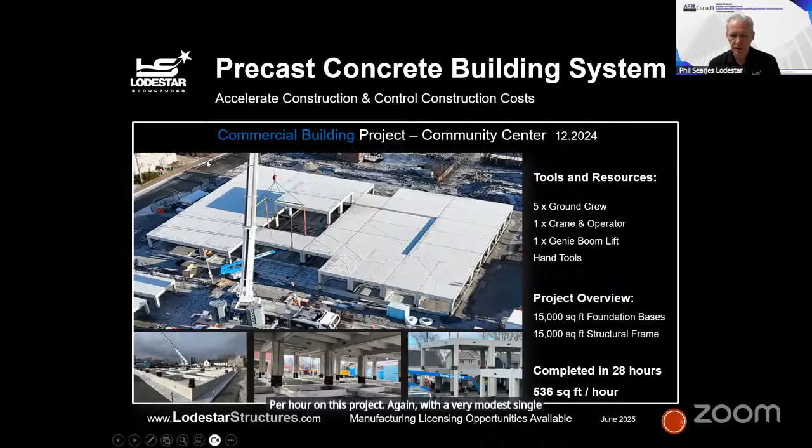Looking at the products available, you saw two of them: the precast base and the precast structural unit. We also have precast architectural wall panels, a metal offsite-manufactured panel that clips onto the building in rapid succession, and precast roof panels. These products round out the major superstructure of the building.

You start with your foundations, a very simple bolt-together solution with the structural unit. The structural unit is brought in, set down, and bolted onto the base. For projects where the base situation may have challenges, or the bases aren't suitable, you can use cast-in-place footings or other footing solutions and mount our structural system on them.

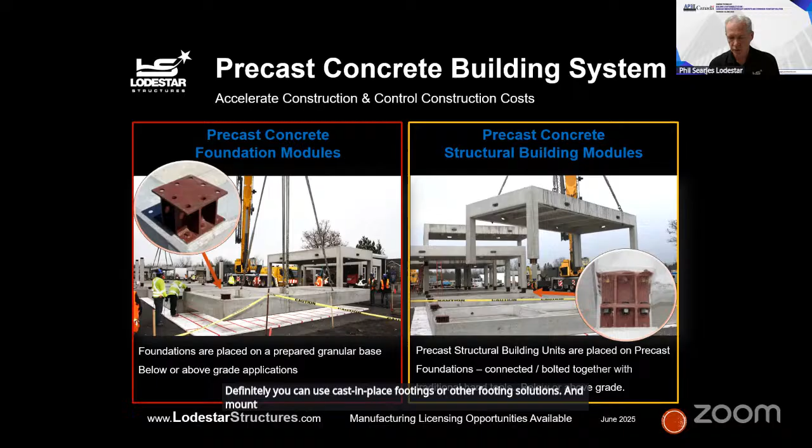The wall panels follow the same scenario. They can be produced ahead of time with an architectural finish, and with windows and doors already blocked out. When they arrive at the project site and are set in place, using minimal tools and equipment, the product itself acts as a finish barrier on the outside of the building.

The concrete roof panels cap the very top surface of a 4, 5, or 6-story building. After you put down your membrane and waterproofing, you would place the precast concrete panel on top of the building. That allows you to have concrete protection on top, so UV, debris, storms, and weather are all handled and the building is protected.

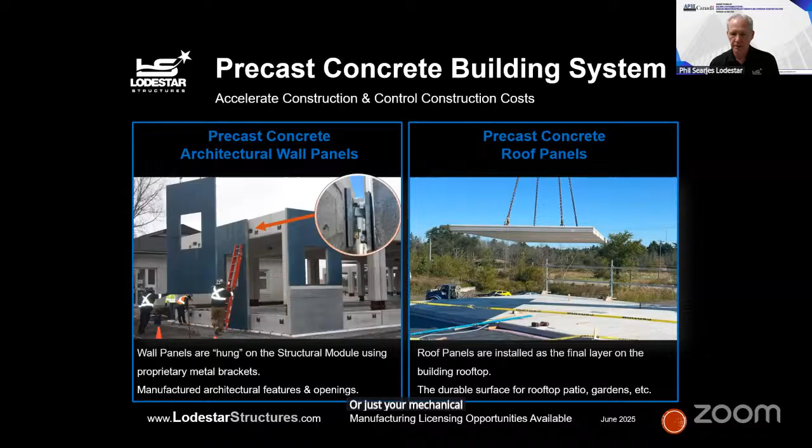It also allows you to use that rooftop space for gardens, for patios, to capture rainwater, to mount solar equipment, wind power generating systems, or your mechanical systems for the building—putting them on the rooftop where traditionally they'd be at the ground floor or using another solution.

One of the products we've introduced is a single module decked out with the metal frame panels, similar to the precast concrete wall panels.

We also have a system that allows you to put a beam in between. When our structural modules are set in place, there's a beam system that can go in to support infill material, which could be hollow core slabs, other beams, or other slab systems common for your market. We also have a double T-slab solution that allows you to span in.

When you introduce the hollow core slab or the T-slab, then it's the capacity of those slab solutions, which could be in the area of 10.5 to 12 meters of span, again with no columns, supporting commercial and residential loads.

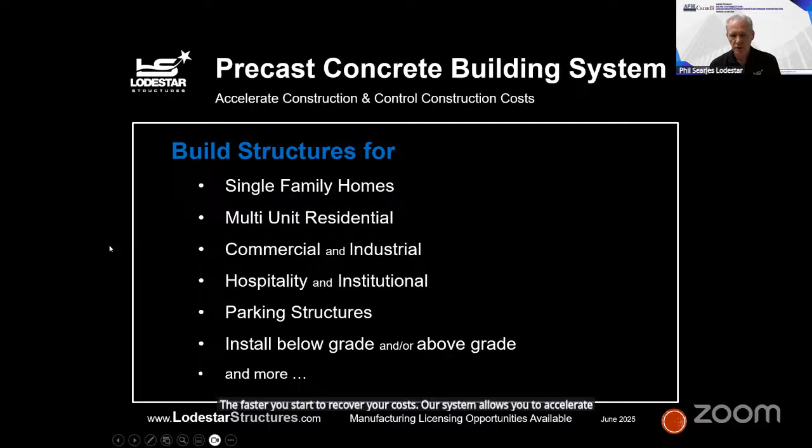You also save on anything associated with time—labor, equipment, insurances, and your delayed return on investment. If you start a building January 1st, the sooner you can have that building occupied, the faster you start to recover your costs. Our system allows you to accelerate that return on investment and get people into the buildings a lot quicker.

Some of the projects we've been involved in, building out communities—whether it's a community built for a developer, government affordable housing, different complexes, hospitality, hotels, or multi-unit residential—it's again a very simple system to design with.

And a very simple system for installation. Every product we produce, in every market we produce it in, is engineer-verified to pass all the building code requirements in your market—seismic, wind load, live loads, hurricane, the whole works. Our system is verified ahead of time to work in those markets.

As an example, we've been vetted currently in West Africa, we're being vetted in South Africa, and we're approved for use in California, Texas, Florida, and Ontario, Canada, and other provinces in Canada that are relatively high in any of those aspects, whether seismic or wind.

I believe the wind rating in Florida is probably the highest we've been rated for, a Category 4 hurricane experience. The seismic rating would probably be California, which is a very high seismic region.

In some of the projects, on the upper screen you see the skeletal view and then partial cladding in the center. On the right side, when the building is done, it looks as traditional as your traditional building system, but assembled at a rate of about 90% faster than current building systems.

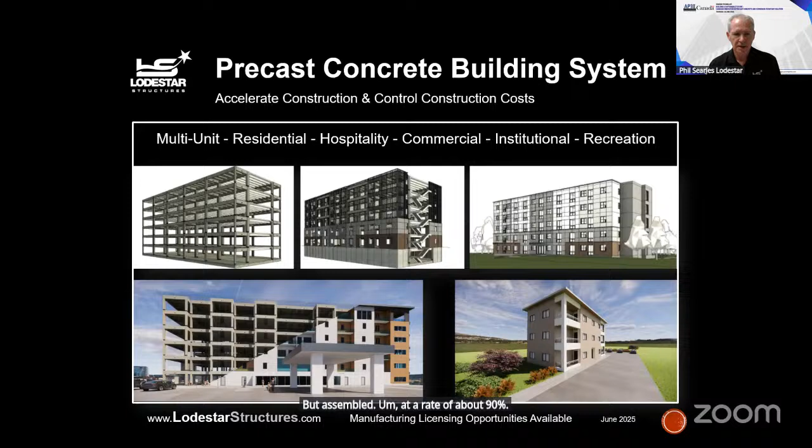Single-family residential as well. Smaller buildings tend to be a little bit less efficient because of the footprint, but even on the smaller buildings, we're showing a savings in the area of about 10% on the building platform, and that's just on the building materials and the labor into it, not necessarily the other associated costs like insurances and equipment that you would need to be on site longer.

The way that we do deploy our building system is that we work through licensed agreements in different countries. So what we'd be looking for and what we're presenting today is the opportunity to work with the precast industry in your markets to license the technology. So we would share the information, the design, all the building systems we have. We would either provide molds and the systems that you require to produce, or we would work with local people in your region to have the molds produced.

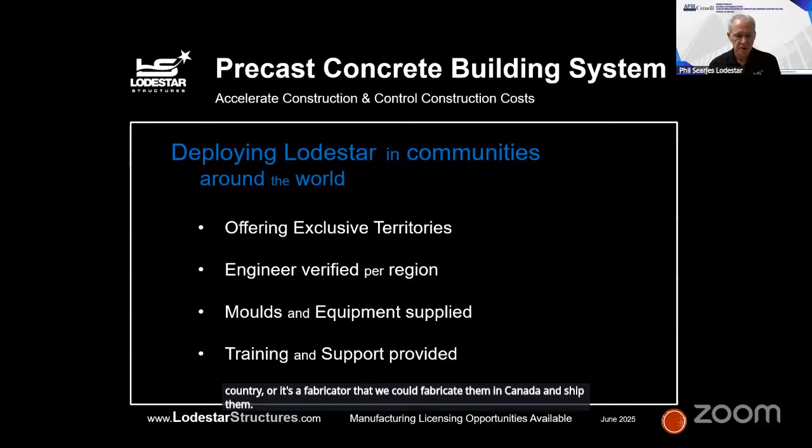The territories would be exclusive. So in a market, you would be the only one producing in those specific markets. As I mentioned, the engineering is verified per region. So before the end product is introduced, it is verified. The molds and equipment are supplied, whether it's a local fabricator in country or a fabricator that could fabricate them in Canada and ship them, or a mix of both. And then training and resources are also made available to you as well.

When we look at the plant, this is a traditional plant for the building system. So we have traditional molds. You see the rebar that goes in, and we do use a self-consolidating, so an SCC concrete, which allows you to do a single cast, so no cold joints, no seams. The product goes in, very simple, very rapid, and we are turning the molds on a 24-hour cycle. So every day we produce a unit, we take it out the following day, we produce another one that day and take it out again. So you could produce up to 7 units per week per mold that's applied in the building system.

When we look at Lodestar, some of the benefits for Lodestar would be that because it is precast concrete, you are naturally competitive with the alternatives of the competitive markets, because you are using local labor, local concrete, local reinforcing, and all the revenue that you as a local producer producing and selling the product, that revenue and the labor and the work all stays in your local community. So not only are you building your community literally by using the building system, but you're also benefiting the community by keeping the revenue and the profitability in your markets.

The components, as I mentioned, are designed to comply with local building codes. If there are any requirements for the system to be adjusted, modified, redesigned in any way, our engineers in Canada would work with local engineers in your market to ensure that the building system complies with all the required building codes, and that when introduced in the market, it does meet and satisfy that.

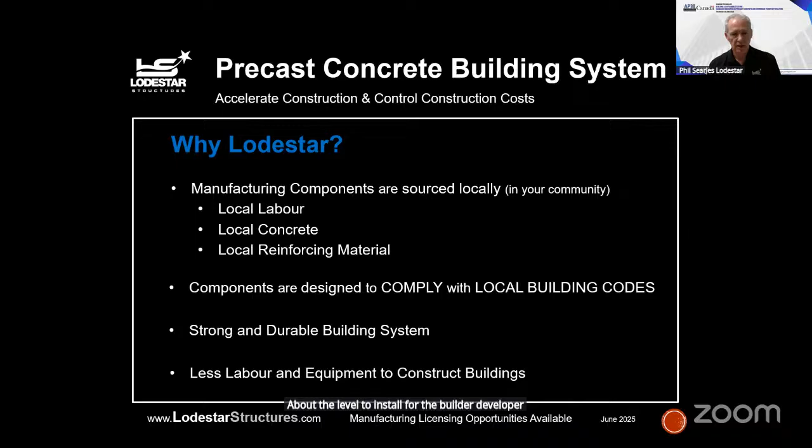So every component that you have is maximizing the efficiencies, not only at our level as a precaster, but the level to install for the builder developer, and then at the level for maintenance and long term. When we look at the building system, we can look at a whole series of features that we're adding, features that we're taking away. But when you look at the building system, the idea behind the Lodestar building system is to give you a system or provide a system that is familiar with the community.

So it's a reinforced concrete solution. It's something that today is used in practically every building that's built. Really what we've done is we've taken that technology, we redesigned the rebar, redesigned the structural elements of the products, and then sharing that with you to allow you to introduce it into your markets.

There's nothing new, I would say, in the building system. It's cement, it's aggregate, it's water, it's rebar, it's labor, and it's molds. Everything in the building system you would resource from your traditional suppliers. There's nothing you're coming back to us in Canada to purchase. Therefore, again, all the revenues and all the profitability and the competitiveness stays within your market to make sure that you are doing the best for your community and the best for your own company.

When we look at what we're reducing, and I mentioned the materials, again, not only at the manufacturing site, at the construction site, and then again at the installation and the ongoing maintenance, we're making sure that all the material waste of the building system is reduced.

The construction schedule, when the products are produced ahead of time and you know the products are available for your building, that reduces or eliminates any risk of schedule concerns where the products are delivered and they can be assembled immediately, whereas a cast in place or alternative system, sometimes you do experience delays on site due to weather conditions or due to a delay in equipment arriving or tools maybe breaking down or not having the proper tools.

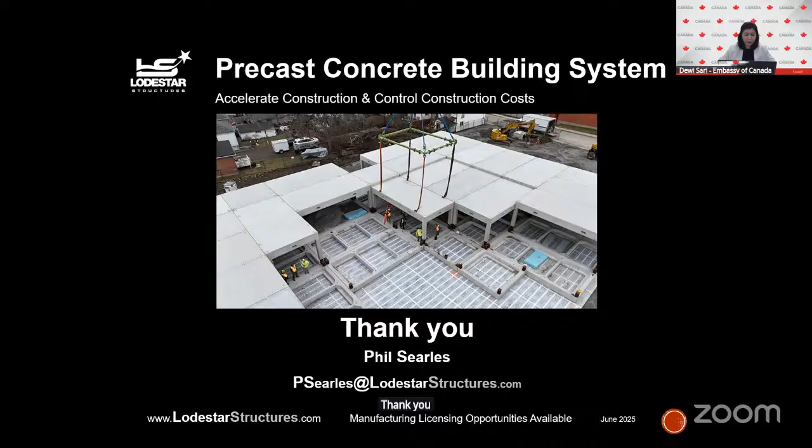So before we move forward to the Q&A session, which is led by Pak Dudung, I would like also to make a summary of the 4 presentations delivered earlier by the Canadian speakers and presenters. So we have 4. The first is EarthTech Group.

They are specialized in mechanically stabilized earth and geosynthetic reinforced soil wall systems. They offer end-to-end services from design to construction, and their proprietary e-wire and e-panel solutions use sustainable geogrid materials to create modular high-performance structures tailored for seismic and site-specific needs. And then the second, we have also today Vector Corrosion.

They are a global leader in concrete preservation, known for innovative solutions like Galvashield embedded anodes and Norcure electrochemical treatments, delivering long-term corrosion protection with award-winning designs. And the third presentation was delivered by Giatec Antoine. Giatec provides smart IoT-enabled concrete sensors that monitor strength, temperature, and maturity in real time, supported by AI-driven analytics to optimize mix designs and reduce CO2 emissions.

And last but not least, we also have Lodestar's presentation from Phil. Lodestar offers a modular precast concrete building system for fast, durable, flexible construction. The system supports stackable, expandable design, and reduces waste, labor, and environmental impact as well. So it's ideal for rapid, sustainable builds with consistent quality and cost certainty. So hope you enjoyed the presentation session today.

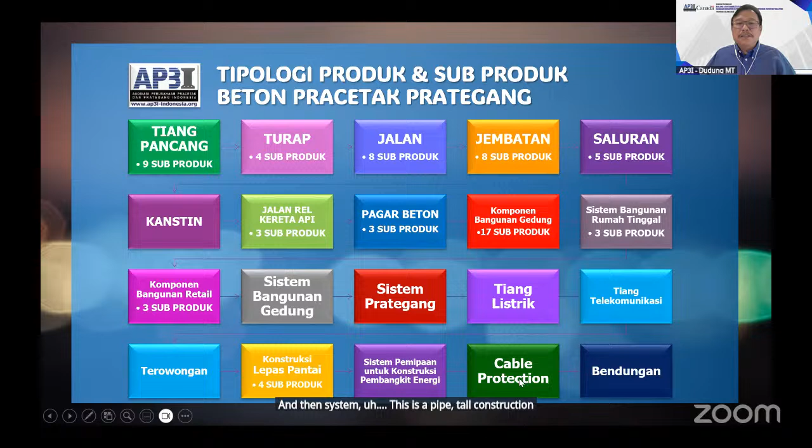We already have support for the MRT tunnel. And then construction for the beach, like a port. And then system, this is a pipe for construction energy, cable protection, and for the dam. This is our picture of the production that we already produce.

This is our typology of product. The main product is spun pile, more than 10 million ton. And then the bridge is the second product, and the third product is turap. This is our production in AP3I that we have already recorded. Tiang pancang, spun pile, jembatan is bridge, and then sheet pile and drain, komponen gedung.